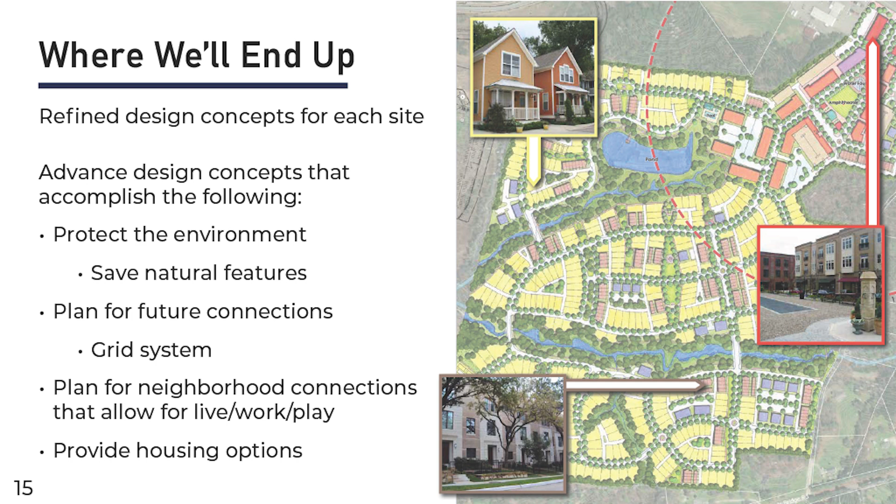So you all saw those very bubbly frameworks, we call them, that are out there, but over the course of these 2.5 days, and into the next few weeks, we're really refining these concept plans into something that looks like something you all are probably more familiar with - a series of roadways with street trees along them, or parks, or potential housing types. Like here, we're showing some townhouses - just to give some examples, some starting points of what these concepts could look like.

So let's get into some of the details. Like the mayor said, back in October of 2023, it was recommended to bring in these 5 areas - area 1, 2, 3, 4, 5. Really, it adds up to 3 distinct areas of growth on the edges of our city in different directions.

So let's start by talking about Area 1. Area 1 is off Parker's Mill and Man o' War. We have Cardinal Run Park South and the new Cardinal Run Park North up here, and of course the Beaumont neighborhood right up against it.

...there is a lot of what we call karst features here. Whenever we see what could be a karst feature on a map, it doesn't necessarily mean there is a sinkhole out there, but there's the potential for a sinkhole. That's the sort of thing that, obviously, you do not want to put houses on top of. So you'll see in our future concepts that we're trying to avoid those areas.

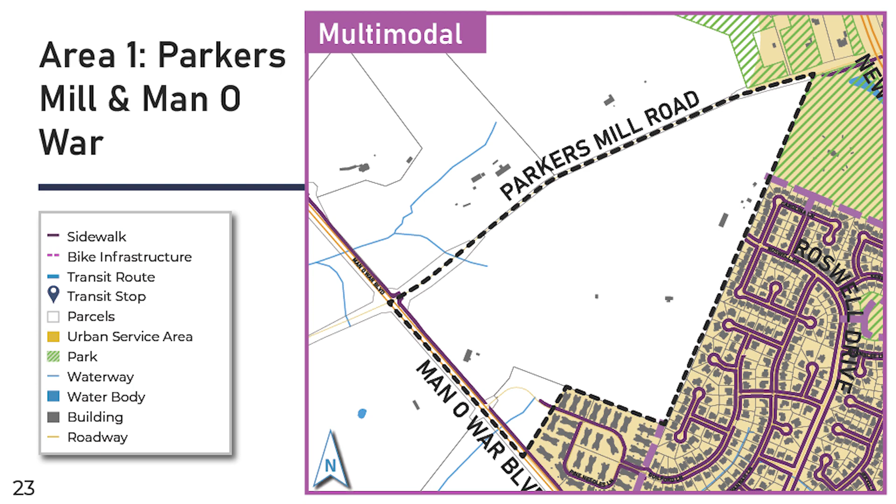So moving on to Area 2. This is on the northeast side of the city. We have Winchester Road, we have Polo Club, which currently tees into Winchester, Hume Road is right here, and then of course I-75 wraps around with 64.

This site is really our largest site, but it's also one of our most constrained sites because we've got farmland on one side, and the highway sort of surrounding the edges on the other side.

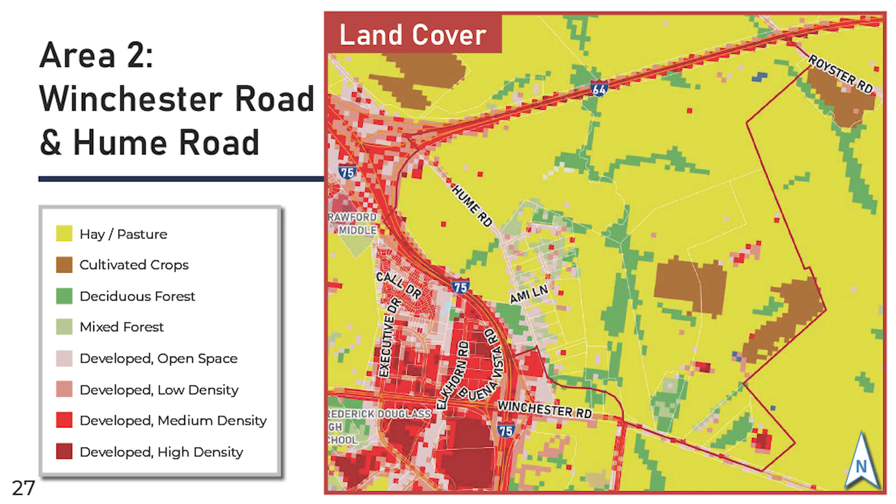You can start to see here that there's an existing single-family neighborhood along Hume Road that we're also trying to be sensitive towards.

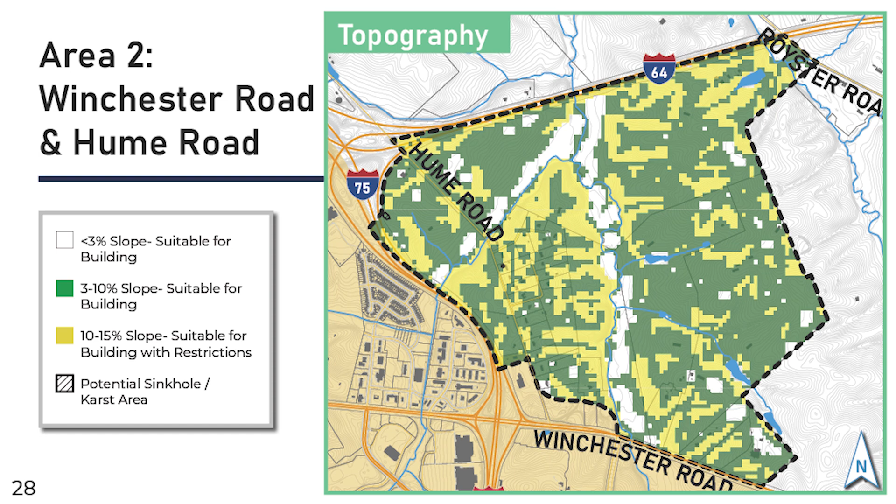Again, we're seeing nice rolling hills, which is what we like, kind of ideal for our work. You'll also see the confluence of two streams coming in here, and so we need to be very conscious of the floodplains that exist with those two, thinking of them as an amenity and not something we're turning our back towards.

For traffic, unsurprisingly, we've got crashes at the major signalized intersection. We're also seeing a lot of crashes here at the on-ramp and at Hume Road. If any of you have tried to make that left from Hume Road onto Winchester, you're going at your own risk for sure.

So there are plans currently to realign Hume Road and bring it into a piece of the property just across the street, and so we're working within those parameters to think about our transportation network.

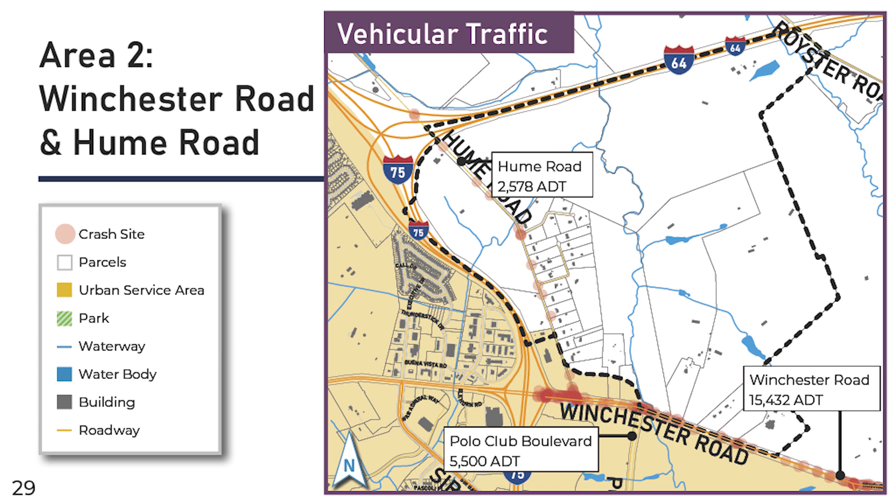Again, multimodal: this area is really interesting to me because it's the closest we get to existing transit service. So I think it has a lot of opportunity to get Lextran to just come on the other side of 75 and circulate within this neighborhood.

When we spoke to them, there's also some talks in the works to serve the new Baptist Health site. Again, talking about traffic, we're sort of in a wait-and-see on what that continued growth around the Baptist Health site and around the middle school and all that development out there ends up looking like for the amount of cars on the road.

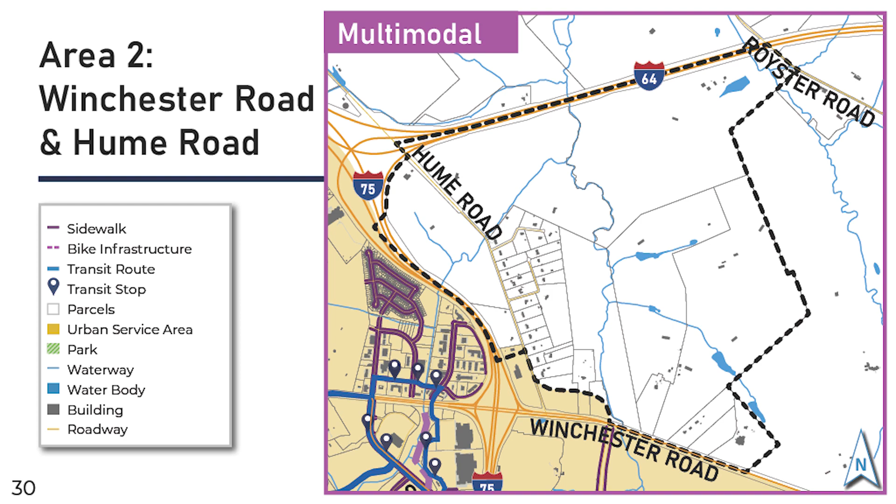Moving over to the east, this is Area 3. So this is Athens-Boonesboro Road, I-75. Here's Brenda Cowan and Hayes Middle, and then Hayes Boulevard is up here at the top in the Chilesburg neighborhood.

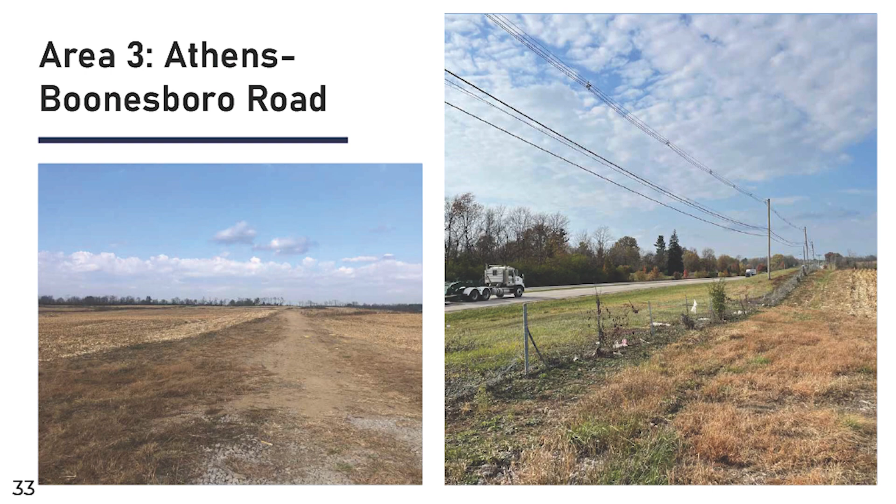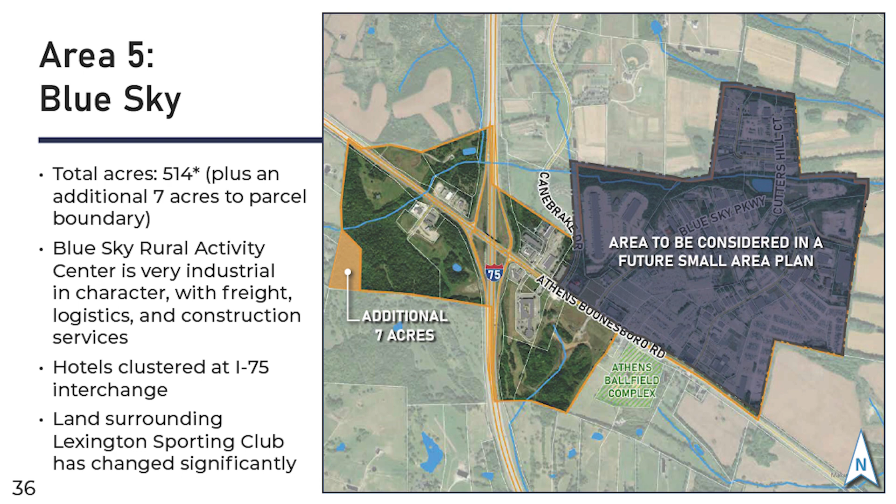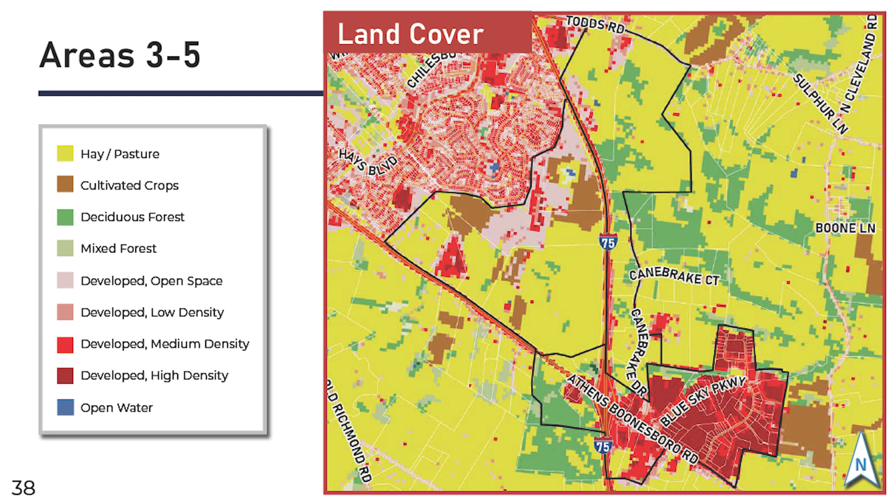So, in terms of looking at how the land is being used, again we're seeing a lot of pasture land, and then some highly developed areas. This kind of pink that you're seeing here, I think is coming about just because the land has been sort of heavily used, so it's not showing up as quite as lush when they do this - this is all done from a very high level, many thousands of feet view in GIS.

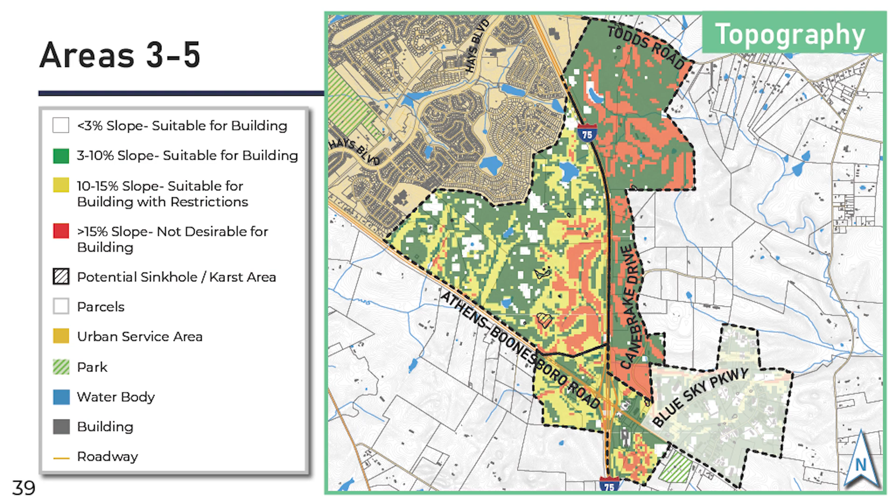So that's a fancy way of saying that it'll be a series of medians and sort of a way to restrict left-hand movements, left-hand turns, so that you'll see less of your kind of standard signalized intersections, but more trying to get more of a free flow in there, and hopefully encourage more traffic movement, but also create a safer way to move along Richmond Road and Athens-Boonesboro.

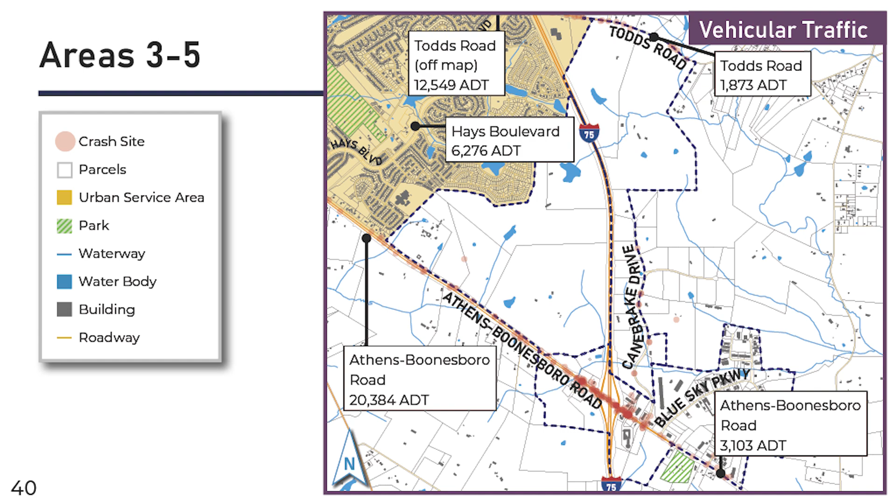And so currently that's planned to come out to Hays, or to the school I think. But now they're in kind of the initial phases of bringing it all the way out to the soccer stadium site. So that's really important for us in terms of how we will be accessing these sites.

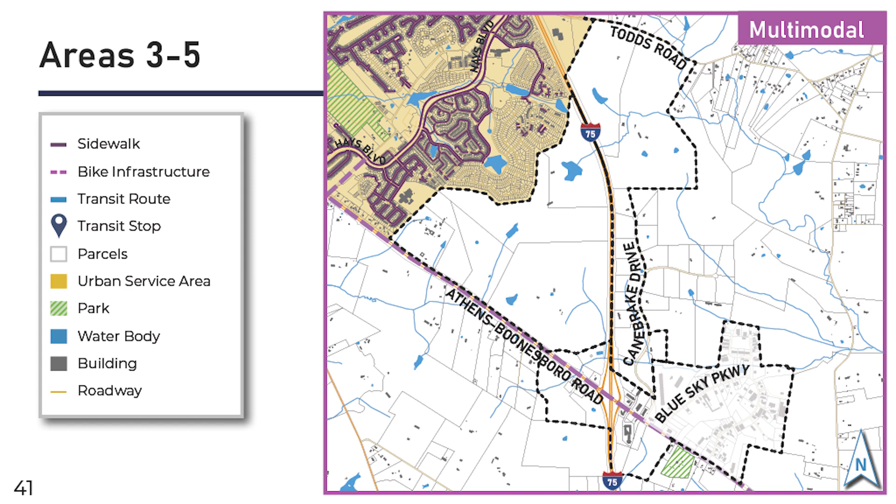While we see a vibrant sidewalk network here and some trail network, it will be very hard for us to connect through and get to those pieces. And then obviously all of this stuff is quite far away from anything existing.

So one thing that our market analysts found, and I'm sure you've heard these numbers from sources like Fayette Alliance and CommerceLex, our projected growth here in Lexington puts us on a trajectory to need about 25,000 more households over the next 20 years, which means we need 25,000 more houses or dwelling units of some sort. So how and where do those go?

Our existing housing stock is made up of a vast majority of single-family detached houses, so very suburban living in a lot of cases. We've got some townhouse product and some multifamily product, but this is not the mix that we are typically seeing cities that are growing trying to trend towards.

The only thing we could come up with was to start taking a lot of their marginal commercial neighborhood areas and creating more mixed-use communities, so the people in Johns Creek could easily get to those areas as opposed to having to leave Johns Creek. It's a lesson learned that we're trying to push out into the communities, and also to you all.

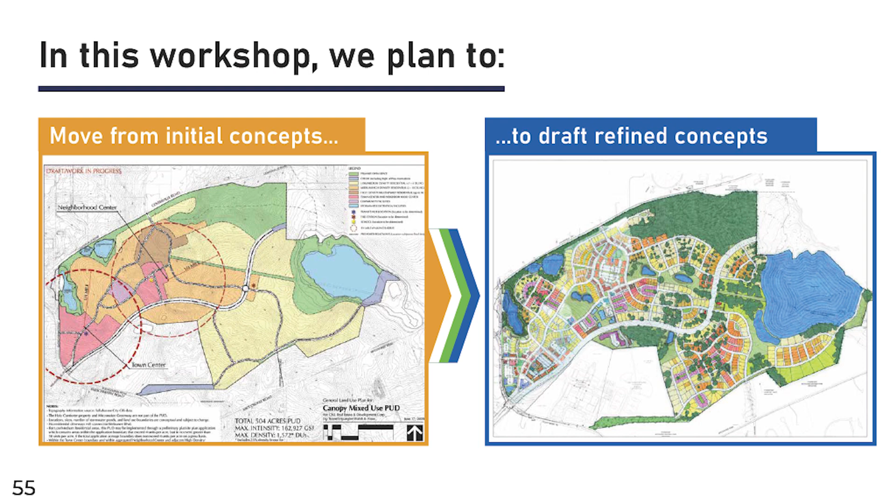So this is what we brought today—that's what you're looking at outside. These are the framework plans. We're trying to get to more of a system where we're connecting into the land that surrounds it. Any place we can connect outside of that, we're always trying to make connections in this particular project.

The pre-workshop, as Sam said, I'm not going to spend a lot of time on this. We really got the existing conditions, and we started developing some big ideas—those ideas are out there in the framework. They can certainly change, and they're already starting to change with the developers who have come and talked to us. So we're sticking to what we came up with conceptually. We're going to refine those plans over the next month and a half and post that information online. Please be a participant—if you see a red flag, let us know, because we will make corrections if there are valid arguments.

The principles we're following are mixed use and diversity, mixed housing, and gentle density. Why gentle density? We're not going to have 200 units per acre like New York, or 50 like San Francisco or Chicago—it just wouldn't work here, it's not what we're built for. So we're talking a baseline of about 8 units per acre, which starts to handle transit, up to 25 or 30 units per acre in the core mixed-use areas. That connectivity, as I pointed out, is so important.

Multimodal, which we'll talk about in a couple minutes, and then sustainability. Every project I've done—I learned this when I first moved to Atlanta. There's a project built in the 20s called Ansley Park, and they conserved all of their drainage system, their swales—that's where all the drainage goes. That makes so much sense, so we always try to save the green fingers. We just designed a city in Atlanta, Georgia, literally a city, with over 20 million square feet of office, housing, and so forth, but we kept all those green fingers coming into the city, a different concept for a city. We want to do the same thing here, preserve that for greater sustainability and better water quality.

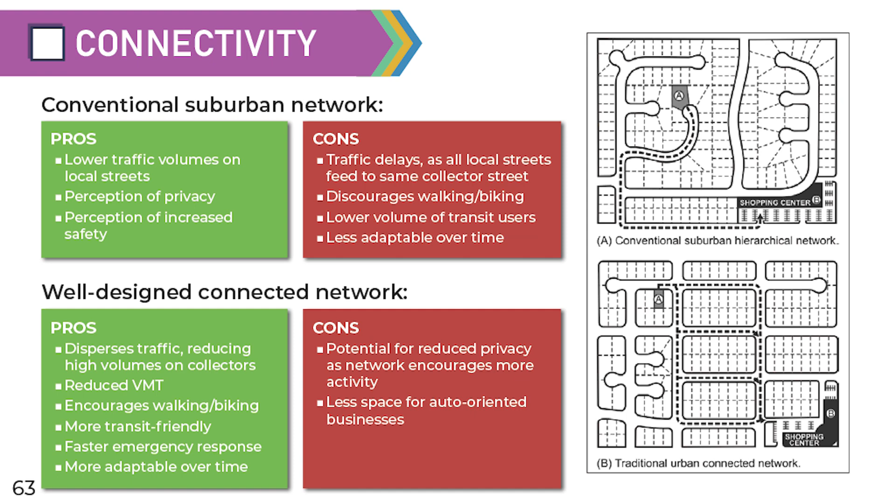Another part of connectivity is where Sam touched on connecting to transit. While a lot of these sites are going to be hard to connect to transit, we really want to do the best we can to create a layout that encourages that in the future, which leads us into multi-mobility as well.

Why is that important? Transit, for instance, is a part of multi-mobility, as are pedestrians and bicycles. It's important that we're providing a network that serves all users. Sometimes multi-mobility comes up as meaning you're just serving pedestrians and cyclists, but personal vehicles are still included in that.

When we start looking at everything being in this area, you don't have to take as many trips outside. We're not saying that no one's going to drive and that we're not accounting for that, but more of those trips might now be walking or biking.

So that's being considered - the shift in transportation equity. A lot of underserved communities previously have relied more heavily on these alternative modes of traffic and not necessarily having a personal vehicle. So providing these other transportation options helps promote that equity.

And then finally, encouraging an active lifestyle and providing those active transportation opportunities. Not only is that great for everyone, but it also helps create that community and sense of belonging, seeing people more. All of those things really help lead to better living experiences for everyone. So that hits on a lot of the transportation stuff, and I'll hand it back over.

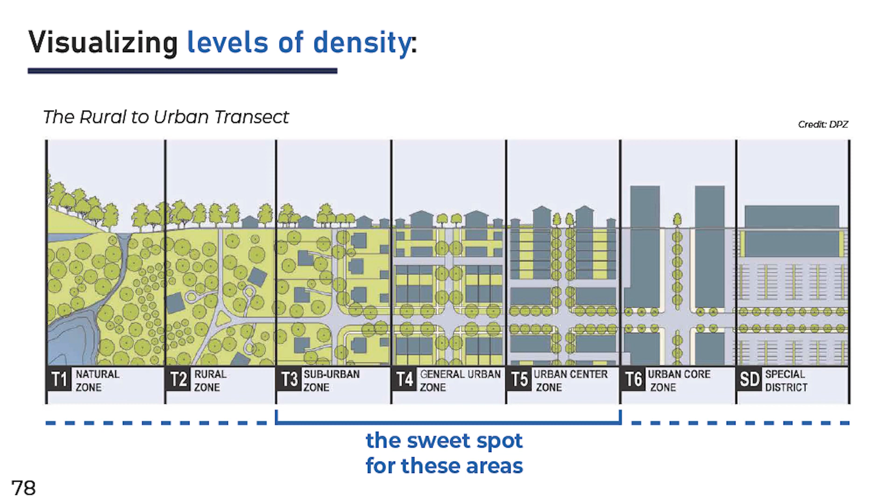So that gives you a feel of what we're trying to accomplish as we go through this project. Our sweet spot—we use this transect. The natural is T1, which is parks and so forth, and T2 is your rural areas. You can have a T1 and a T6—for instance, Central Park in New York is a T1, and all the housing phases around it are T6, so they can intermingle. But we're looking to have it be T3, T4, and T5, where the 8 units will be in this area, and then you build up your density as you build up into more of the urban center.

So with that, we're going to go through the different components of your area, but the initial concept shows the grouping of mixed use, the grouping of intended densities, the street network, open space, water, and unbuildable areas. And again, you'll see that on the charts out when we're outside and talking to you. So I'm going to let Sam go walk you through those.

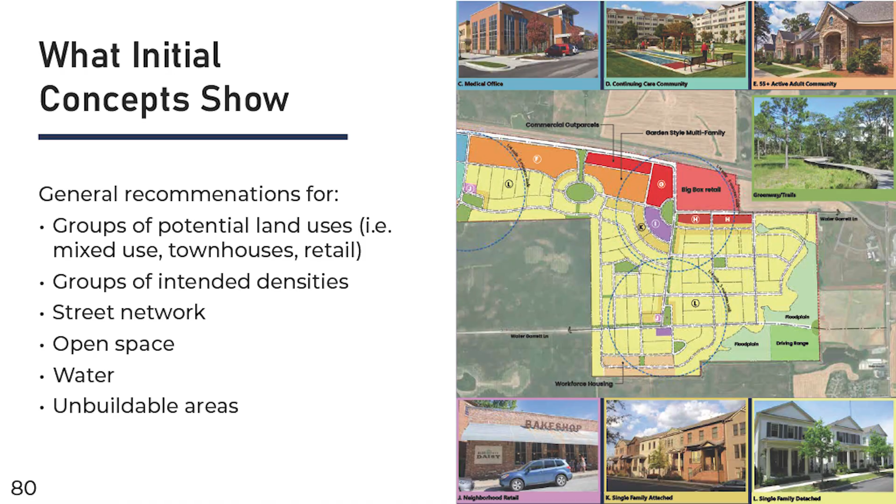Okay, so I'll walk through these fairly quickly because I know people have different interests in different ones. In some cases it's better to talk through it out at the boards, but I want to give you the highlights of some of these.

I think what's important to remember, and like we've said, is these areas are really big, much bigger than we think. Even the smallest of these areas, in any other part of Kentucky, would be towns unto themselves. So it's really important to keep in mind that these aren't just a continuation of suburbia, but need to be their own standalone places.

So we'd talked about this being the one area where it's great because we get access to two main roads, so we're pushing a sort of boulevard or avenue product through the neighborhood. We're working our way around some of those potential sinkhole karst features, potential non-buildable areas, but also thinking about starting a neighborhood center right at this really important corner, which becomes a gateway, really your first gateway if you're coming from the airport or from Keeneland along Man o' War Boulevard into the city.

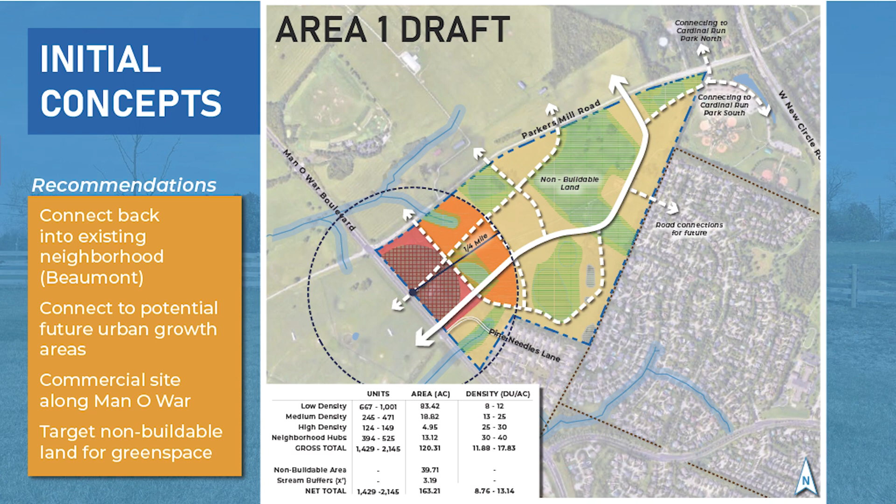The other thing that's important to note is getting some connections into the neighborhood, which you're not seeing fully here but will get more fine-grained, is also how we start to connect into the bicycle and pedestrian network that already exists in Beaumont. And then also connecting into these two big park products, so that folks are using what we've got out there, what we're spending all the money for, right?

And then also you'll see in all of these showing those potential future connection points that would really end up looking like a stub street up against the edge of the boundary. But so that doesn't end up happening, we've learned that lesson. We want to be able to connect in the future, 50 years down the road, 70 years down the road, and make sure that if we do end up growing that way, we haven't literally backed ourselves into a corner.

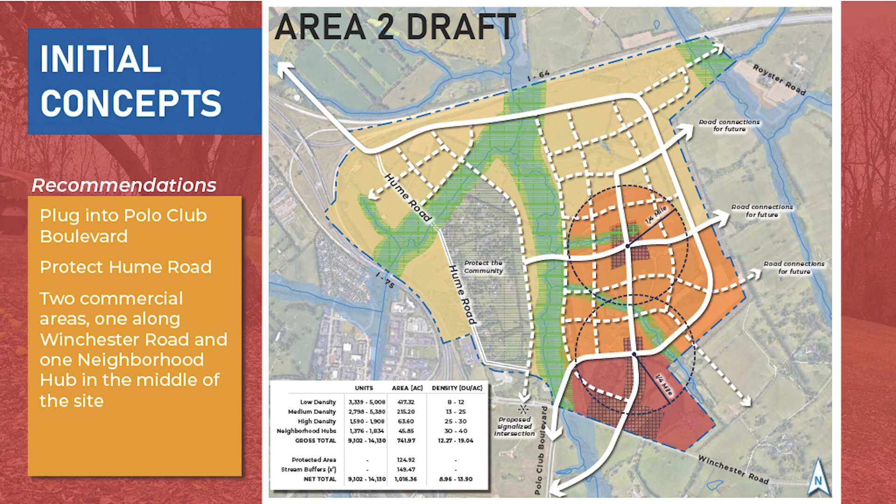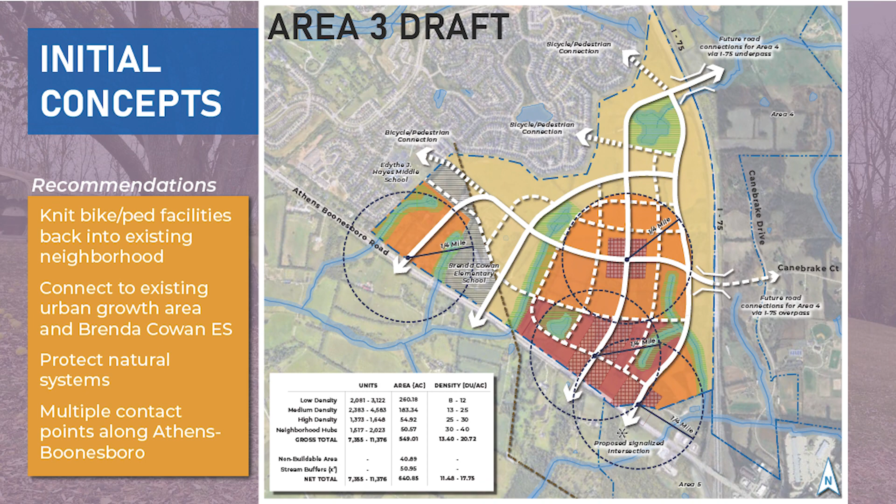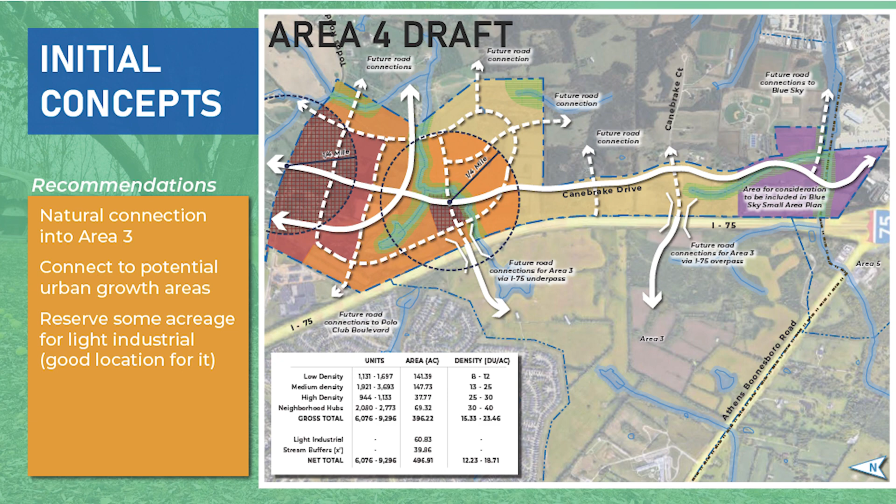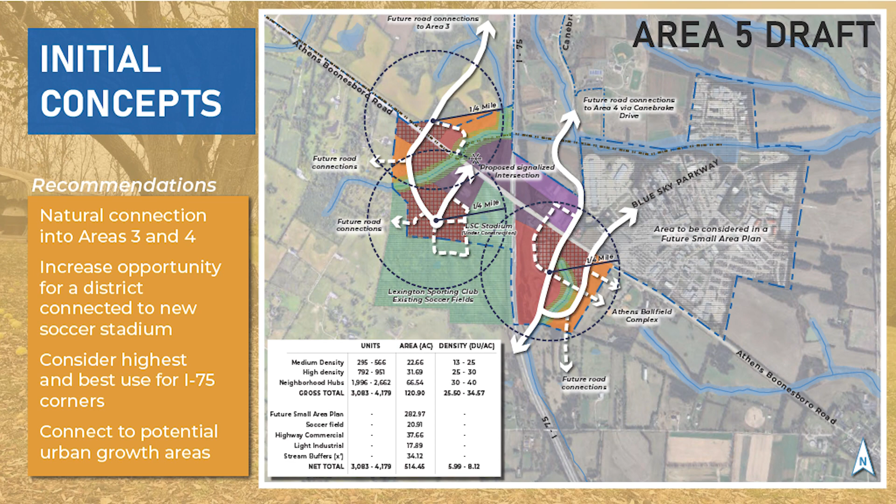Last but not least is Area 5. Soccer is here, so just thinking about making those connections across to Area 3, and then connections across up into Canebrake, and really pushing — when you don't really have any neighbors down here, especially in the corner — how can we push density as much as possible and really start to up those number of housing units, with different types of housing, the variety of housing that we were looking for.

So put on your seatbelts, I'm going to try to get through this pretty quickly.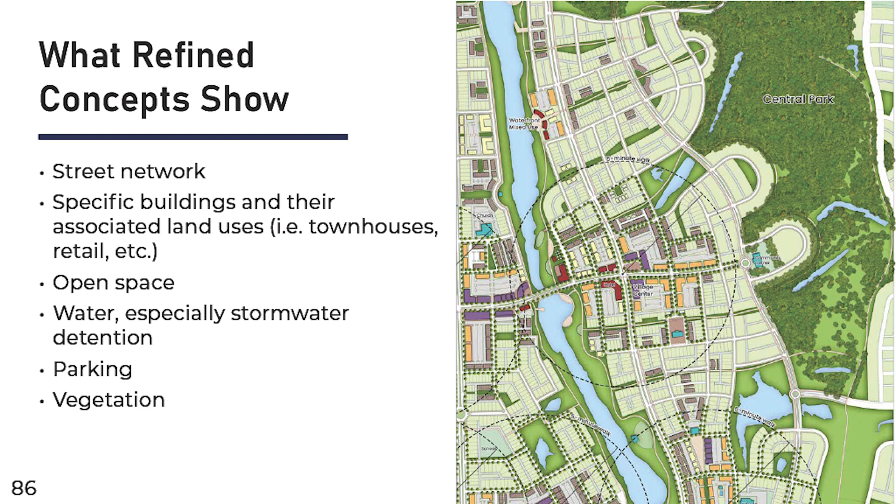There's a water feature on this particular land that is astounding. That used to be an old mine pit, but you have to see it to believe it. We have lots of connectivity throughout this whole site, it crosses all through even through the park in a couple areas. By making smaller lots, we're able to get all this green space and preserve the natural features, and that's sort of what we're going for with yours.

So what is the type of housing that would fit into a project like this? We've had a lot of discussion yesterday, the home builders were in, and you currently have a limited amount of type of projects or products being built, and it might be good to introduce some product that I think would be popular in this area.

We're finding that we just started doing this in the Tulsa area, and they're very, very conservative in that area, but it turns out there was this demand that they didn't know existed, and they're starting to sell out on their units.

So these are single family, small lots. A typical lot is anywhere from 70 foot wide to 150 foot deep - that's a normal conventional lot. We're looking at 50, sometimes 70, or 35 by 70, so they're smaller lots, but you get the same square footages, you're just going a little bit differently - you might have 3 stories versus 2 stories or 1 story, and we will also have the 100 foot deep lots and so forth. So we're not going to eliminate them, but we're going to give more variety and more choice within that area.

Then the townhouse product - again, I don't think you have a lot of townhouse product here. When I first moved to Atlanta in 1992, there was hardly any townhouse product. Now I'd say there's probably 30% up to townhouse, and they're very popular. Sound attenuation has been worked out, so people don't mind living in them and actually like living in them, and families are living in them.

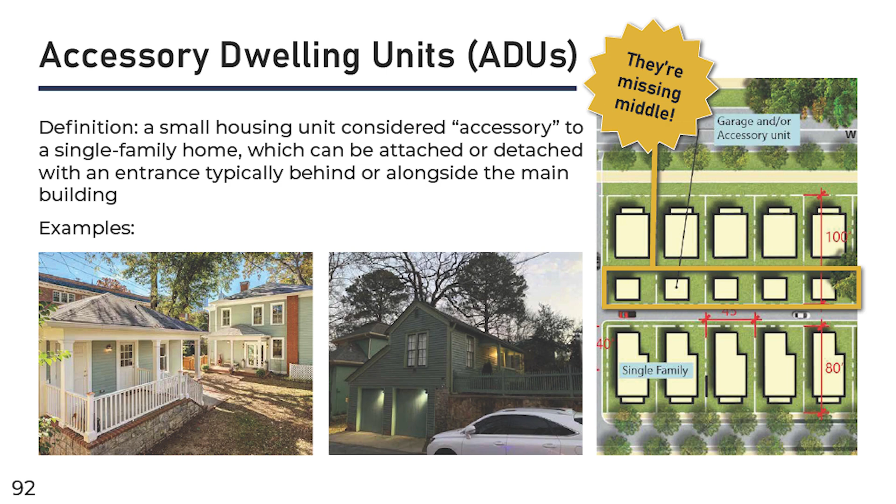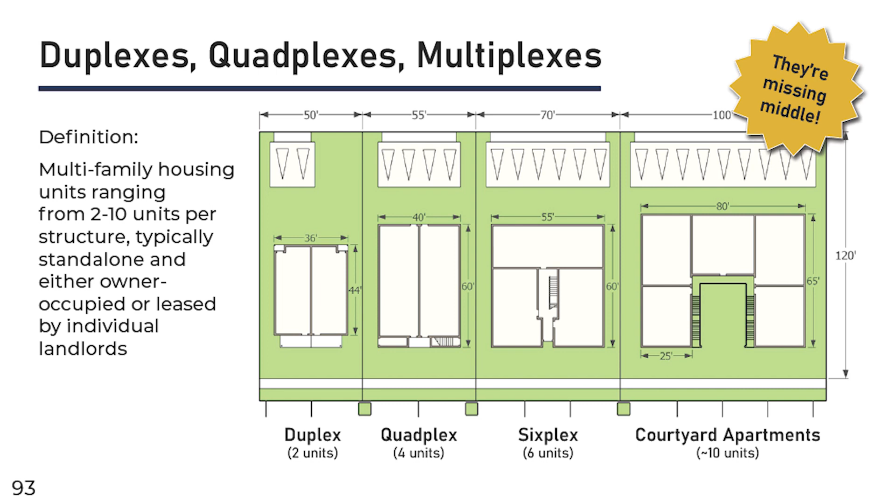What we've looked at is the 2-plex, the quadplex, and the 6-plex. These are great units, you can put them on small areas. They look like homes, they're designed to look like homes and so forth. We love these things, and this is some examples of what those might look like - some that we've designed, and some that have been built in the 20s. So we really like seeing these, and we don't congregate them in one area. We spread them throughout the project, so they feel like they're part of the community.

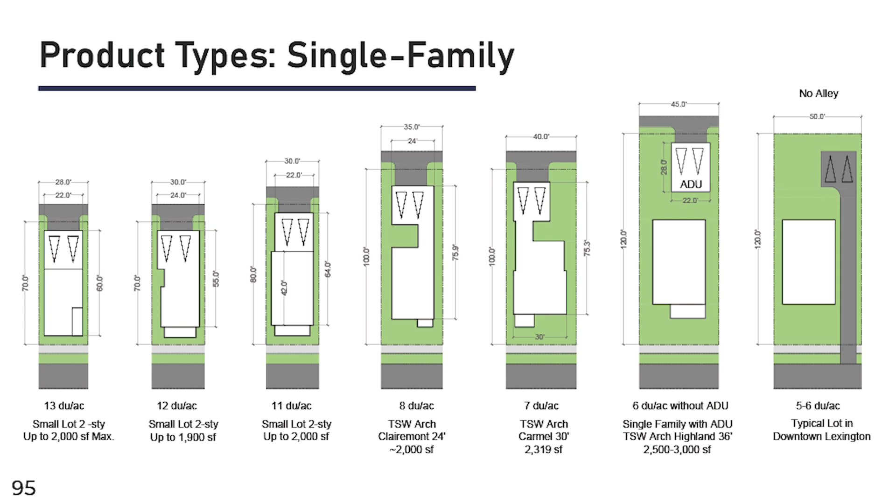When you get to the single-family type houses, this one is a 28-foot wide lot by 70-foot deep, but they go up, as you can see, to much larger lots. So again, we're just trying to get a variety of housing that you might not find here. You might all be up towards this area right here, mostly, but we'd like to see some of this introduced as well. And then the townhouse product, again...

This would be for a little courtyard in the back, parking. Sometimes these are carports versus garages, again saving the money, putting all the money into the townhouse, or you have a garage. A lot of townhouses, especially the wider ones, have a master down, and some are putting elevators in - you at least leave a place where you can put a residential elevator in. That price has come down considerably in the last 5 years.

And then you have the missing middle, which is the duplex, the 6-plex, and the 4-plex. So these are a lot of missing middle type, would be more rental type project.

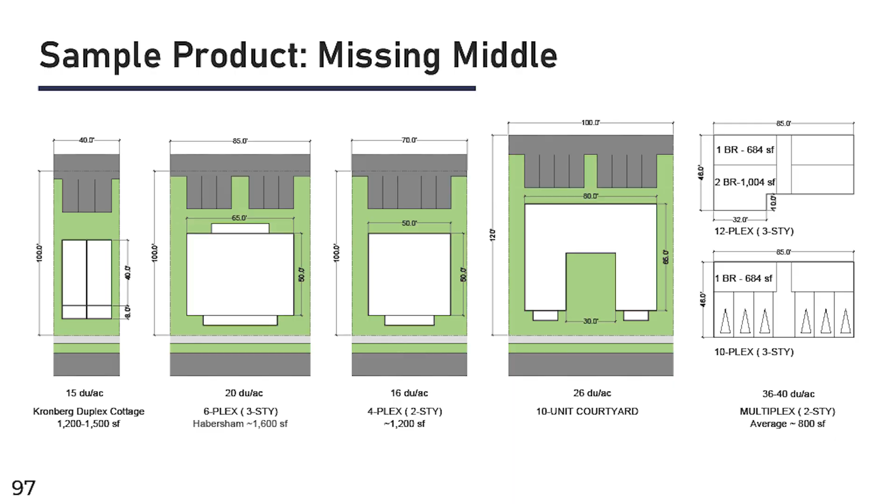And so the final thoughts really are: refine design concepts for each site. Advanced design concepts accomplish the following - protect the environment, save natural features, plan the future connections, and some sort of a grid system, whether it's modified or a total grid. Plan on the neighborhood connections that allow for live, work, and play, and provide housing.

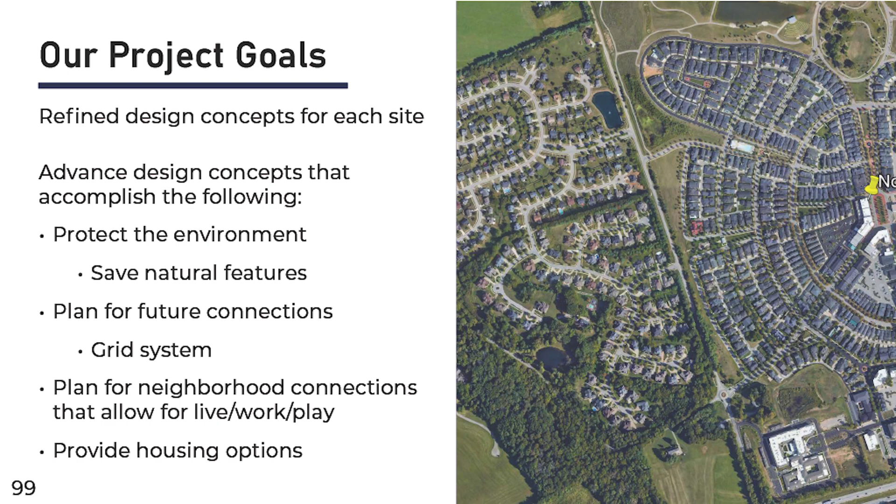And the last thought - if any of you live on Hume Road, we don't want that road touched, or any road like that. If there's other roads in this study area that you feel reach that same level, we're going to try to protect them. We don't want to see those roads destroyed. That's why we worked very hard, as Sam pointed out, to get the road systems away from it and not impact these historical roads that are so beautiful.